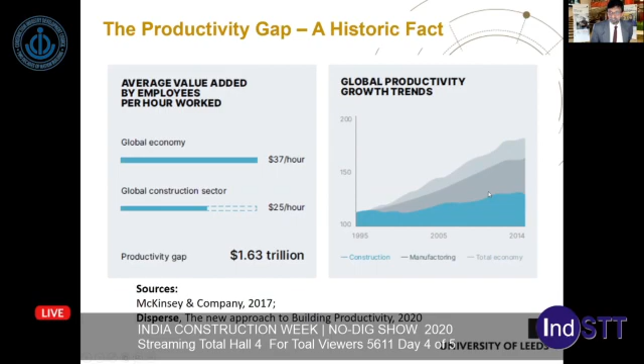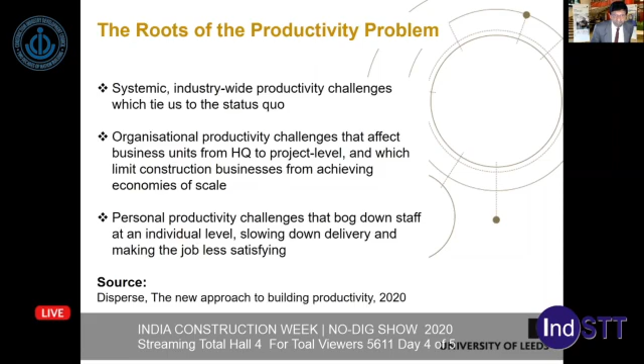And what are the roots of the productivity problem? According to Disperse, a company which is now focusing on improving productivity, it is systemic industry-wide productivity challenges which tie us to the status quo, organizational productivity challenges that affect business units from headquarters to project level and limit construction businesses from achieving economies of scale, and finally personal productivity challenges that bog down staff at an individual level, slowing down delivery and making the job less satisfying.

What did COVID-19 do to the construction industry? Initially, there was a loss in construction activities due to the stoppage of all construction activities. And slowly, it was realized that there is the need to revive the construction industry, because investing in infrastructure projects would help to re-engage the construction workforce and drive the economy forward.

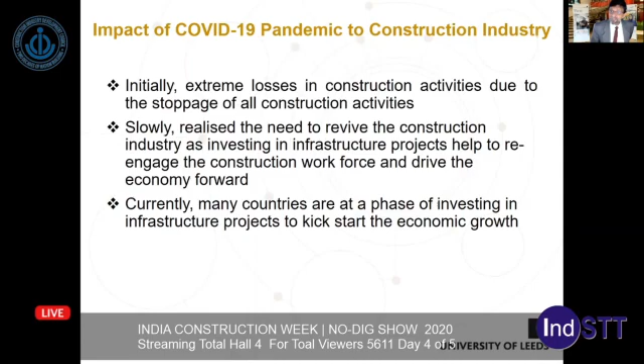So currently, many countries are at a phase of investing in infrastructure projects to kickstart the economic growth. So the objectives of my presentation today are to demonstrate how construction productivity could be improved, particularly focusing on COVID-19 safe activities on site.

To introduce a range of research and innovation in construction materials and technologies which could improve construction productivity, and to share some ideas in education and training to help improve the quality of workforce and thereby the quality of the infrastructure projects.

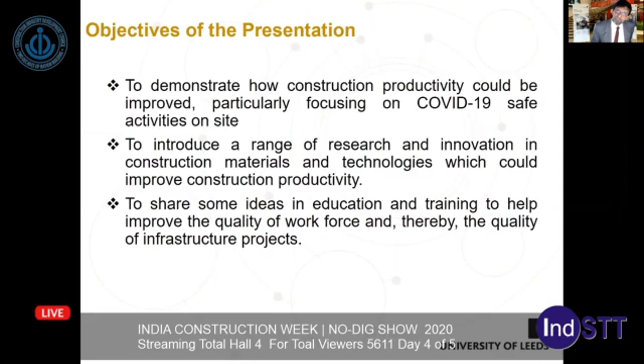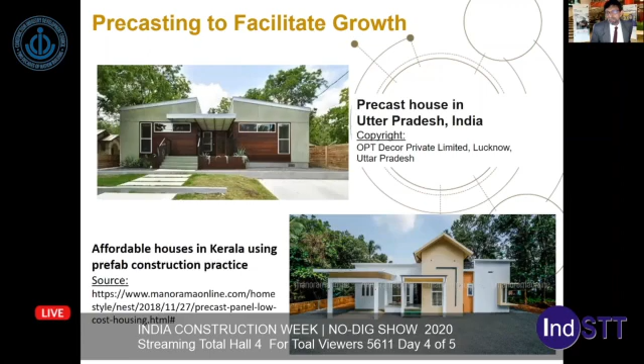So let me give you a summary of building productivity through technological innovations. And first, precasting and 3D printing. These are two examples from India where precast concreting is used to construct residential houses. The first example is from Uttar Pradesh and the second one is from Kerala.

In both cases, the facilitating factors are the fact that we have high strength, high performance concrete now available. The admixture technologies would facilitate the construction of prefabs. Advances in fiber reinforced concrete and pre-stressed concrete would enable this, and there is improved understanding in structural connections to facilitate the connection of structural prefabricated units. And of course, there is the improvement in construction workforce that would be required for this type of work.

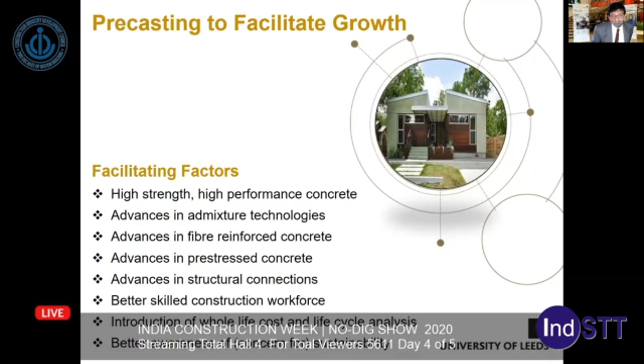So there's a change from considering just the cost of construction at the beginning to whole life cost and life cycle analysis, which also helped in going for precast concrete manufacturing. And people are now more aware of and concerned for sustainability, which is also driving this.

Another area is the FlexiArch. It is used for small to medium span bridges. It's an example from Northern Ireland. You can see from here, the flat pack precast units are brought in, lifted, placed in to form the arch, and then tied together to get the bridge needed. It is patented and promoted through a precast concrete industry company in Northern Ireland called Macrete. It's successfully used for spans up to 18 meters, highly cost-effective and durable, and bridges can be instrumented to obtain performance in service.

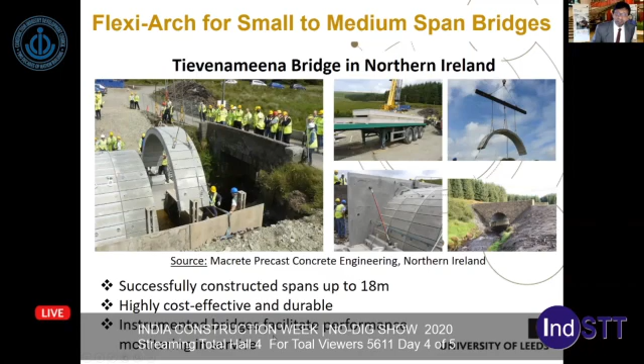Now, the second technology is 3D printing. As you can see from here, from 1997 up to now, there is an exponential growth in the use of 3D printing and additive manufacturing.

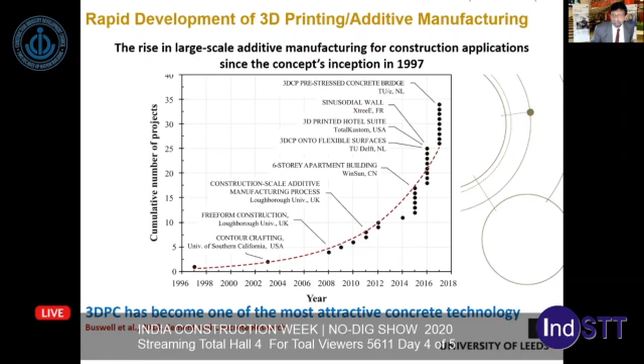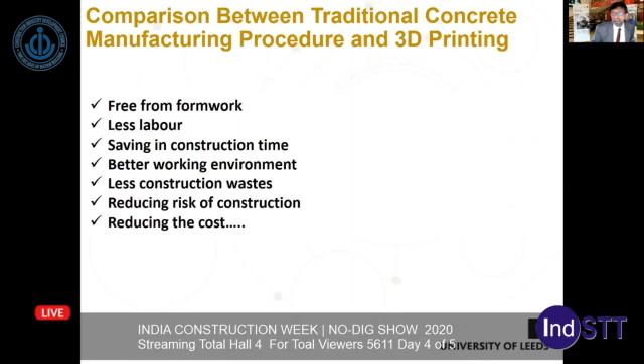It is becoming an attractive concrete technology, and the reasons are: there is no need to use formwork, less labor used, there is a saving in construction time, there is better working environment, less construction waste, reduces the risk in construction, and it reduces the overall cost. All of these would facilitate 3D printing to become a technology for the near future.

You can see the world's largest 3D printed building in Dubai in 2019. It's a two-storied 3D printed building constructed by a US-based company. It used local materials and it is efficient in insulation, hence reduces the energy consumption.

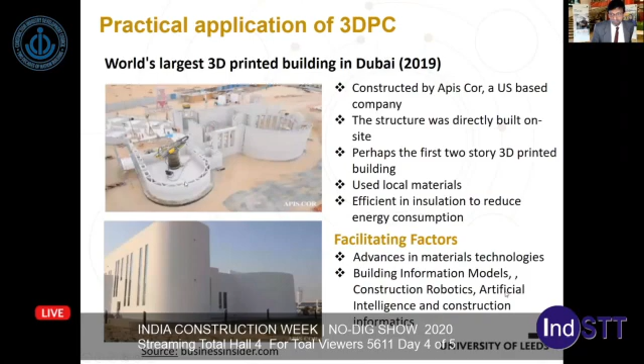What are the facilitating factors for going for this 3D printing technology? Of course, one is the advances in material technologies. Second one is the advances made in building information models, construction robotics, artificial intelligence, and construction informatics.

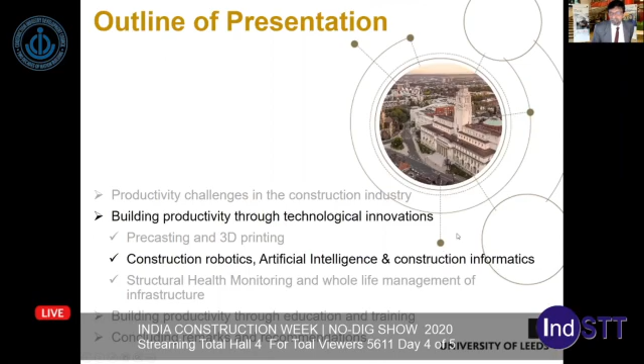So just wanted to have a brief chat about construction robotics, artificial intelligence, and construction informatics. Construction robotics would become the new normal because, with advances in technology, robotic technologies are widely used to achieve greater efficiency in the performance of construction tasks and also to improve working conditions in the construction phase.

The market drivers are high level of construction growth expansion activities, unsafe environment which would result in injuries to labor, and, like what we have faced recently, any pandemic could bring in uncertainties.

It can be used for different construction activities such as structural demolition, bricklaying, assembling prefabricated components, welding, construction of roads, unlocking different advanced design possibilities, and carrying out aerial surveys of structures for different applications.

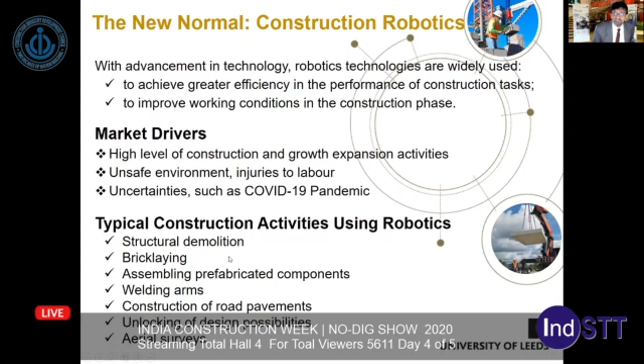Here is another example where the image-based system is used for advancing the technology. This is called a virtual sieve. Instead of using a physical sieve, an image-based system can be used for characterization of sand, gravel, and concrete.

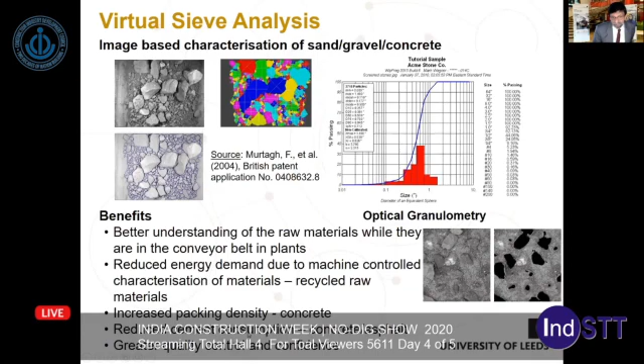So you get the distribution of the material, and from that we will be able to decide what pore structure is likely to result, and how much material needs to be used. We get a better understanding of the raw materials in the conveyor belt in plants. We can reduce the energy demand, increase the packing density for the concrete, reduce the consumption of cement, and the overall quality can be improved.

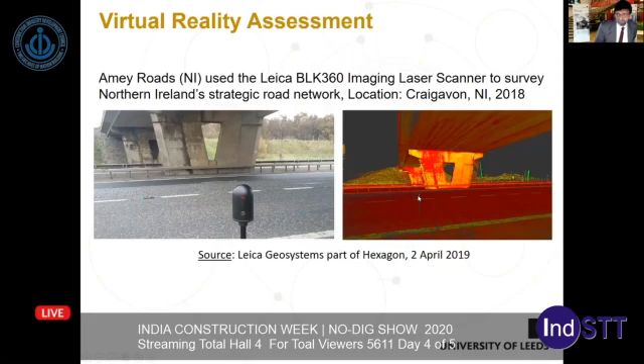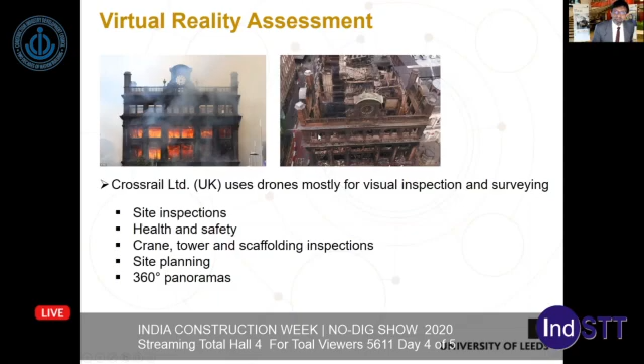Crossrail in the UK used drones to inspect structures. This is the example I've shown here, a building damaged by fire, for site inspections, health and safety inspections, crane, tower and scaffolding inspections, site planning, and getting a 360-degree panorama of the structure. For all these reasons, we can use drones and image-based technology.

And talking about image-based technology, here is another case: a cliff edge in Northern Ireland. This work was done by Aimee McCabe from Queen's University. You can see on the left-hand side, it's 60 meters high.

The boulder field is inaccessible for doing any surveying, so you can use drones to survey and capture the image, and photogrammetric models can be built from which you can get really, really accurate measurement of the boulder on the slope.

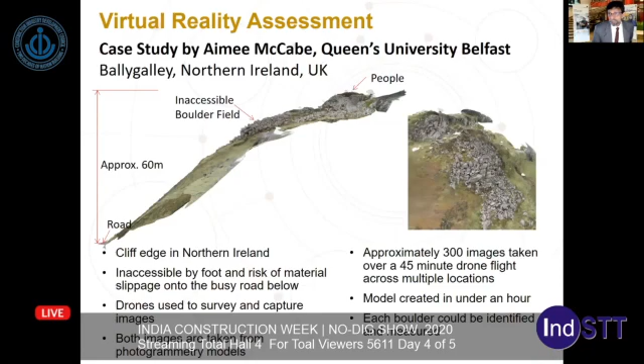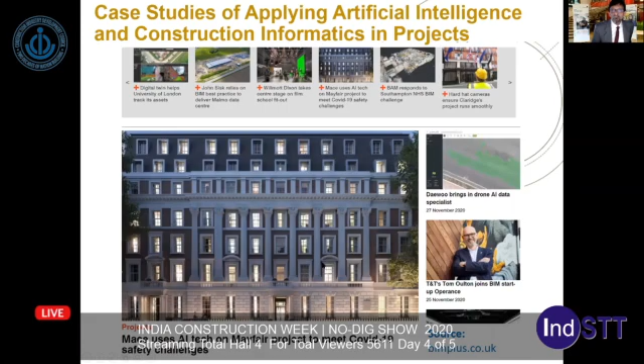So a combination of artificial intelligence and construction informatics can be used in different projects. This is a snapshot taken from a publication which you can get from bimplus.co.uk. Digital twins are used, and this particular case is actually the Mayfair project owned by Mace, where a particular AI technology pioneered by Disperse is being used for COVID-19 safety, managing the building for COVID-19 safety challenges. So you can see different systems can be used in combination for different applications.

A brief mention about structural health monitoring and whole life management. The rationale for structural health monitoring can be seen from this slide. The blue line here is where the construction at inception, the initial stage itself, is of top quality, and slowly the performance deteriorates, but it will never go below the minimum acceptable level.

Such a system is possibly used for nuclear containment structures; however, the cost associated with this could be really, really huge. If, on the other hand, you try to save the cost and compromise the quality at the beginning, you can get complete failure, which means there has to be complete reinvestment in the structure, causing a huge amount of money to the industry.

However, what is normally done is a certain level of initial quality is ensured. There will be deterioration with time, and at a particular stage, when it reaches the minimum acceptable level, there will be an intervention strategy to restore the structure, and again it will be allowed to deteriorate and then restored again. The cost associated with this is possibly going to be less than the cost associated with the first case. And how do we get this information?

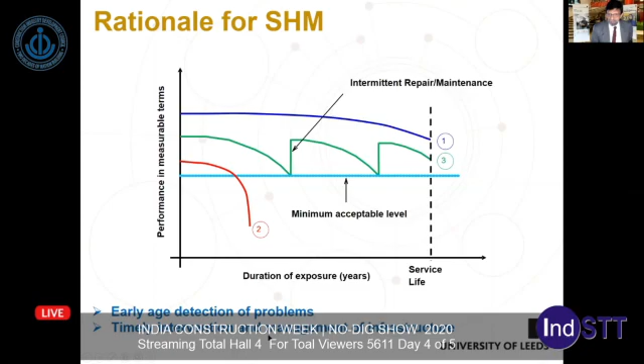How far it has deteriorated - that information can come from either periodic inspection or putting structural health monitoring systems in place. That means for early age detection of problems as well as timely intervention and management of infrastructure, structural health monitoring systems can be used.

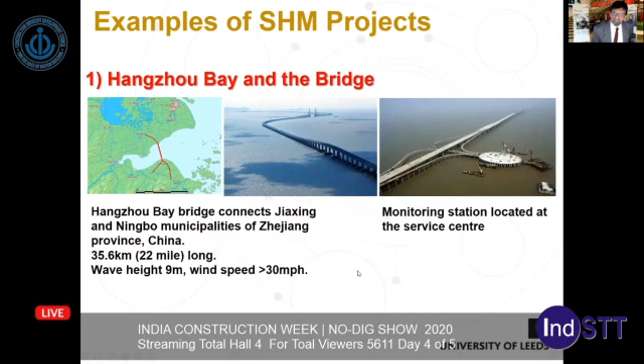Two examples I want to share with you. This is the Hangzhou Bay Bridge in China, worked on in partnership with Zhejiang University. It's a bridge 35.6 kilometers long in very aggressive conditions - for example, the wave height is 9 meters, wind speed more than 30 miles per hour. We have a service center here, somewhere in the middle of the bridge, and that is where we located our monitoring station.

And this is another example: the Dornoch test site in Scotland, where we installed sensors in test pillars and measured the performance of that.

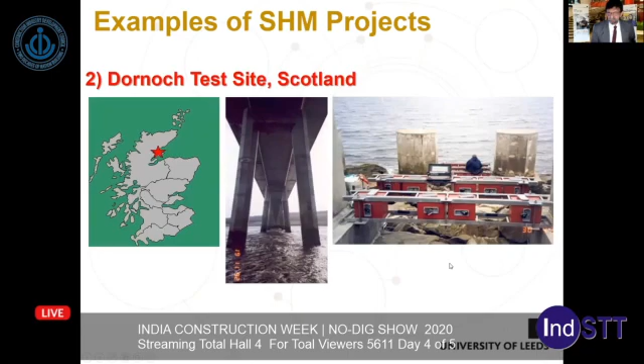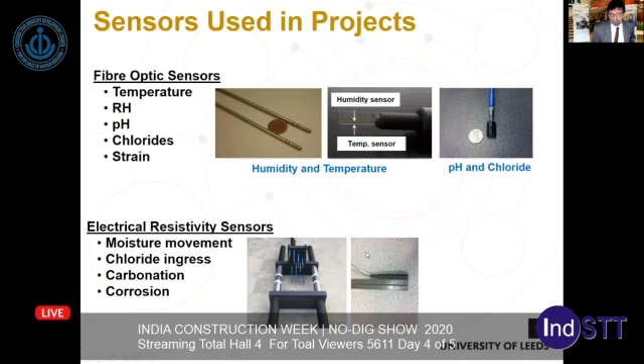Different types of sensors are available, both fiber optics as well as electrical resistivity sensors. The fiber optic sensors can be used for temperature, relative humidity, pH, chlorides, and strain, and these are some of the sensors we developed in partnership with Professor Ken Grattan and Tong Sun's team at City University, London. Electrical resistivity sensors can be used for moisture movement, chloride ingress, carbonation, and corrosion, and these sensors were developed in partnership with Professor John McCarter at Heriot-Watt University, Edinburgh.

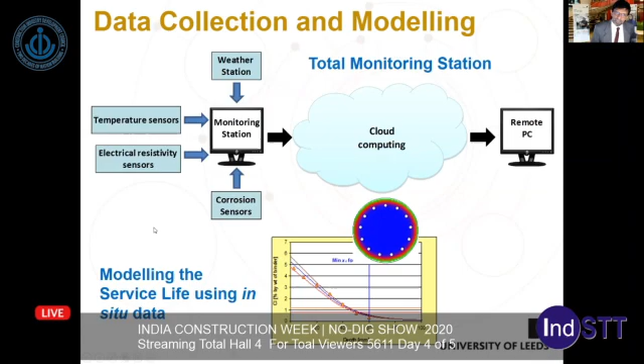So we can have the monitoring stations connecting to a remote PC using cloud computing. We get the data, and that data can be used for service life prediction. Depending on how the structure is behaving, intervention strategies can be brought into practice.

The next one then is building productivity through education and training. University of Leeds signed a partnership agreement with the Institute of Concrete Technology to offer advanced concrete technology training for graduates, and at the end of that, they get either a PG diploma or an MSc degree. When somebody gets through that, they can get the MICT, the membership grade of the concrete technology.

Now there are three routes to admission. One is the normal degree route for the MSc, but there are two other routes which would be really interesting for people working in industry. One is called the experiential route - say somebody worked in industry for 20 years, and the last 5 years at managerial level, that experiential training can be written up in 1,500 words, and we do the assessment of that independently by two people, then admission to the degree is provided.

The second is the accredited certificate training - if somebody did a number of CPD trainings and accumulated sufficient training, that also can be used for admission. So there are three routes for admission. What we are trying to do next is work with the Institute of Concrete Technology to develop online education, available all over the world, providing CPD certification, and the credit accumulation can be used for academic and professional qualifications.

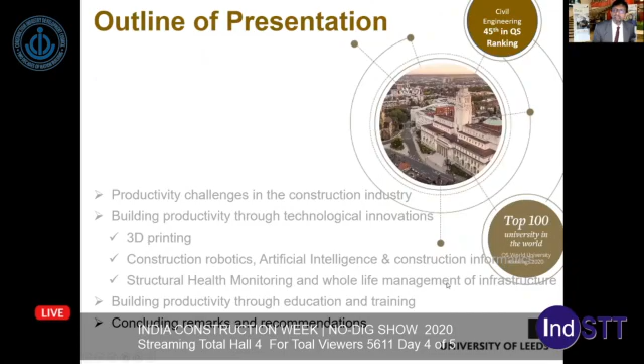So, concluding remarks then: building productivity can be done through partnership. The partnership can be with professional institutions and learned societies, like the Concrete Society, Institute of Concrete Technology, the American Concrete Institute, RILEM, or possibly the Indian Concrete Institute and various other organizations.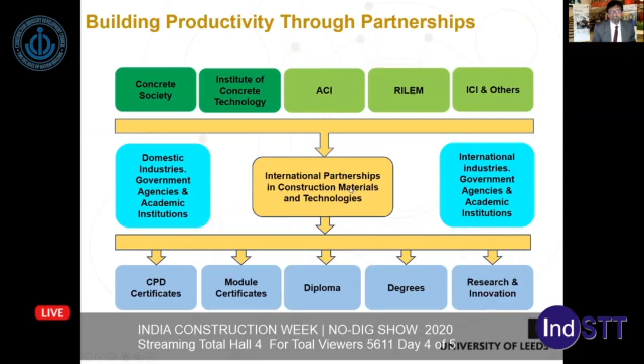We can work with both domestic and international industries, government agencies, and academic institutions. This international partnership in construction materials and technologies can result in CPD certificates, module certificates, diplomas, degrees, and research and innovation, which will drive more technological advancement accepted in the industry, thereby improving productivity. Educating the workforce as well as putting research and innovation into practice through international partnership would help in building productivity.

To do that, we need continuous funding from both government and industry. We need strategic partnerships such as with high technology companies, IT industries, and R&D institutions. We need global partnerships so that pandemics of the type we faced can be addressed, and we can ensure social and economic development in the countries.